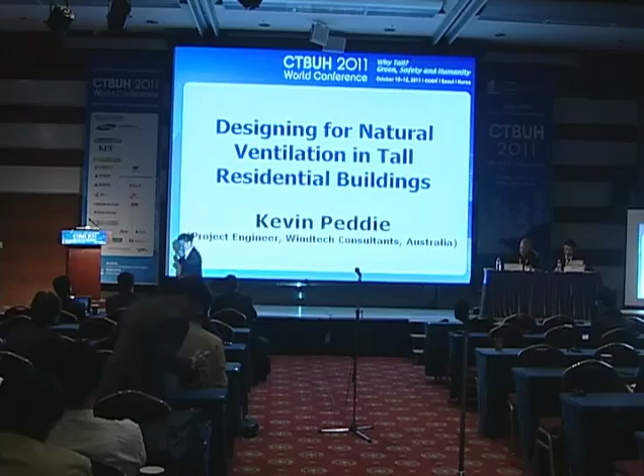Good afternoon, everyone. Today I'll be talking about natural ventilation for tall buildings. Natural ventilation design is something that is able to help the efficiency of the building after construction. A lot of these things aren't generally taken into account during the actual design process at an early stage. A lot of times we've been approached by architects or developers after the development's already been put in concrete. This does have a substantial effect on the design and the actual performance outcome.

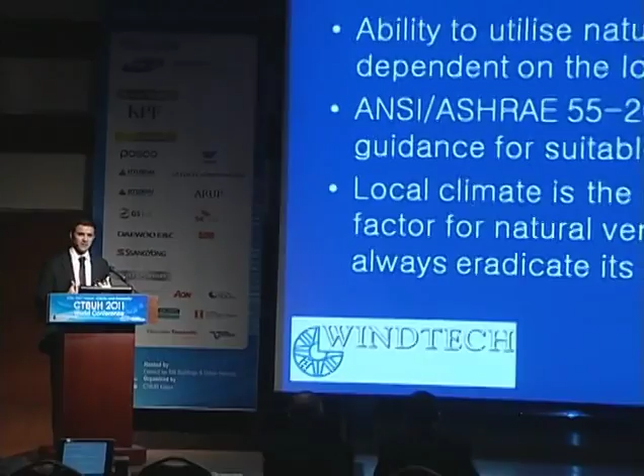Natural ventilation is something that's very much reliant on the location of the development. The building's location with its surrounding terrain, surrounding buildings, its local climate as well, is very dependent on what sort of output will be generated due to the flow through a residential apartment.

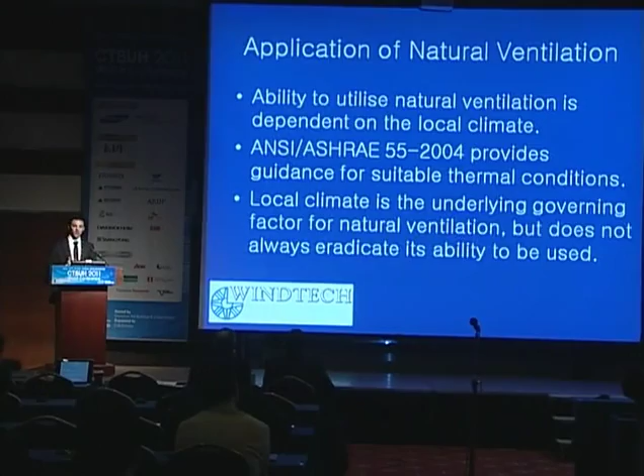ANSI and ASHRAE 55 provided guidance for what thermal conditions will be suitable, because there's two main key areas for natural ventilation: the air quality and also the thermal comfort of an occupant.

So when you think about it for yourself, you're in an apartment, either in a hotel room or so forth, the main thing you're looking at is: is the room too stuffy to breathe adequately, or is it too hot, too cold? Those are the two main areas of concern. This applies both in your own home, apartments, hotel rooms, and the like.

There's certain levels of allowances in these different temperatures or suitabilities that you'll be willing to handle depending on what control you have over the situation. If you're in an environment where you can't control the temperature, like this room at the moment, you'll feel slight changes in temperature. However, if you're at your own house and you feel slightly too hot, you're more welcome to get up, walk to the window, open the window. The temperature might not be that much different, but you feel in control of the situation, so you're willing to have slight variances in your body temperature.

The other thing to think about is whereabouts in the world it is. In Australia, there are certain temperature ranges occurring, not just times of the year but also times of the day. We have quite a mild climate in Australia whereby the temperature at night and during the day doesn't fluctuate substantially. But if you look at the Middle East, during the hot summertime, the day is extremely hot, whereas during the night, due to the clear air, the temperature dissipates quickly and you get quite cold nights.

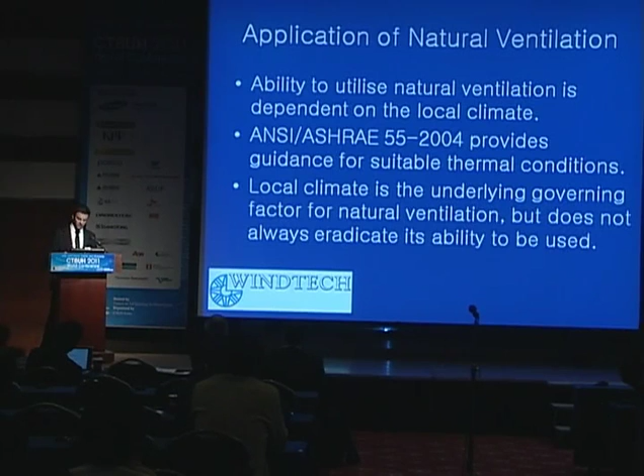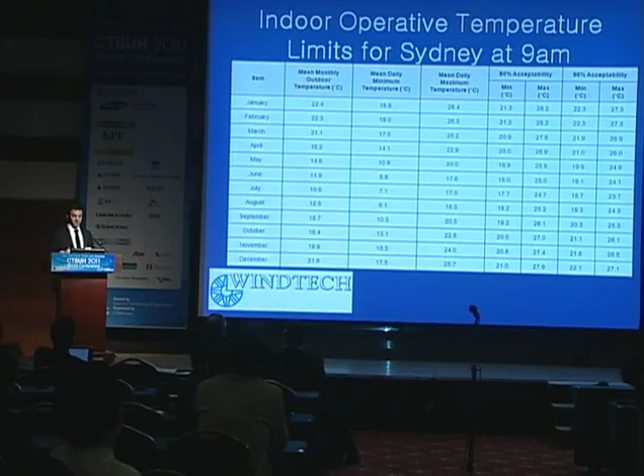I'll now show you an example - this is Sydney, in the morning, and then I'll show you an example in the afternoon. The way ANSI looks at it for temperature differences is it looks at the mean minimum temperature and the mean maximum temperature, and takes a look at a survey done to assess 80% acceptability by different occupants and also 90% acceptability.

So there's not really a strict guideline or criteria, it's more about getting the majority of people satisfied with the local conditions. You can see for Sydney, during the summer months, the mean daily temperature and the mean daily minimum temperature compared to the acceptability ranges can be satisfied. However, when you start looking at the winter months, which for Australia is June, July, we now start to fall outside of these ranges, so people start to find it actually becomes too cool for their liking.

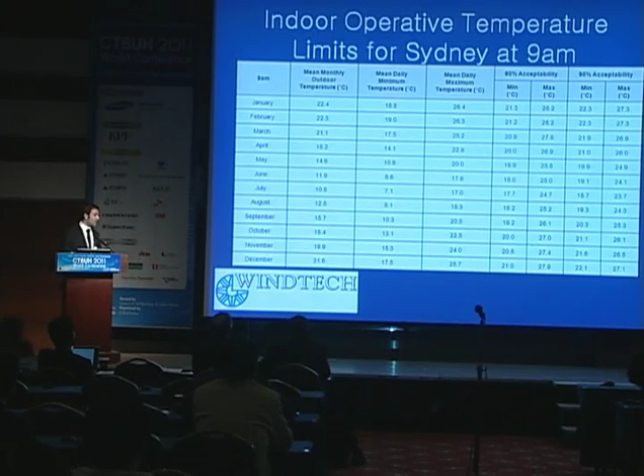I'll show you an example of this in the morning, and an example in the afternoon. You can see here it now extends a little further, not just for June but also July and August, where you have this issue.

I actually had a personal experience of this, buying a new house at the start of the year—well, not new, a house technically termed as having potential. The previous occupants had a total of 14 vents located on different aspects. This was beautiful during February when I bought the place. The house was nicely aerated during the day when I was out, and I came home at night feeling fine.

However, coming into June and July, I started to notice airflow was not really what I wanted during these times of the year, so that was quickly fixed with a bit of gyprock to hide those holes. The aspect I had to take was that I found it too cool, so I had to close this system down. However, the benefits I was finding at different times far outweighed these other circumstances. This could be controlled a lot simpler than closing off a fixed vent—it can be used through an operable window.

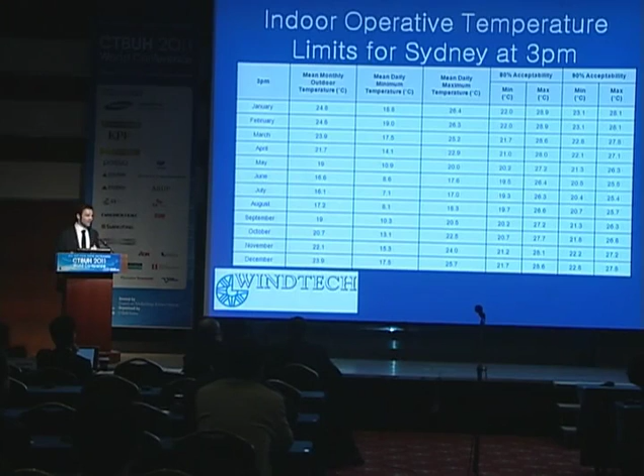Other benefits of natural ventilation are not only for the occupants themselves, but also running costs. One study looked at the effects of taking a new development and designing it to be naturally ventilated as opposed to a retrofitted development. For a new development to account for all the procedures, a cost per occupant is about $1,000 per person for changes like additional window openings. However, to retrofit an existing development, you're looking at about $3,500 to $4,000 per occupant.

However, when we look at the benefits, the study found the benefit for health showed about $60 per occupant—not much to say. For energy, it's about $110 per occupant per year, so it's still not weighing up too well. However, a further study found that productivity, not just for residential but also office-based setups, showed a benefit of about $3,900 per person per year.

This is measured by looking at a couple of factors. One is actual absenteeism from work—I found that a building designed for natural ventilation has 70% fewer absentees. This is due to better air quality. With a mechanically designed room, air changes through the space have to be in the range of about 5 air changes per hour, because the quality of air being pumped in isn't as high as nature, whereas a naturally ventilated space gets fresh outdoor air coming in and exiting another avenue.

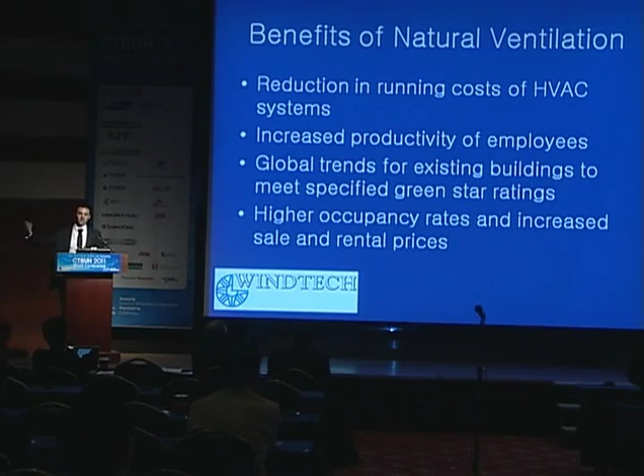You think, gee, that's relatively high considering this is where our parliament is, so it's heavily dominated by government employees. However, when he actually looked into that 11% further, there's a 2% component for buildings designed for high energy efficiency, while the remaining percentage is pre-existing older buildings that haven't been retrofitted. So you start to see, just by designing more energy efficient buildings, owners are getting a much greater return, not just through higher occupancy, but higher rental returns as well.

Now, natural ventilation criteria really depends on what the building is and what the intended use of a space is. It could depend on the size, so the requirements for this room here, which is to be utilised by a larger number of people, as opposed to say a bedroom or a study, is obviously going to be different. There's also the intended number of occupants, and the materials used within that room, because materials themselves give off an odour that needs to be transported outside, otherwise it creates stuffy smells inside.

Now, this generally equates to about 1 to 2 air changes per hour for air quality, based both on the ASHRAE standard and the Australian standard. There's a separate criteria for thermal comfort, which I mentioned previously, which is ASHRAE 55. Further to these criteria, there are also sometimes local planning requirements for some areas.

Some of these might require up to 70% of units satisfying naturally ventilated needs for a development to be considered naturally ventilated. However, a lot of the time, the actual planning requirements don't know the nitty-gritty of how efficient a building should be. For instance, local planning in Sydney itself, which I'll show some case studies for coming up, says for a building to be naturally ventilated, you need to achieve 60% of apartments considered naturally ventilated.

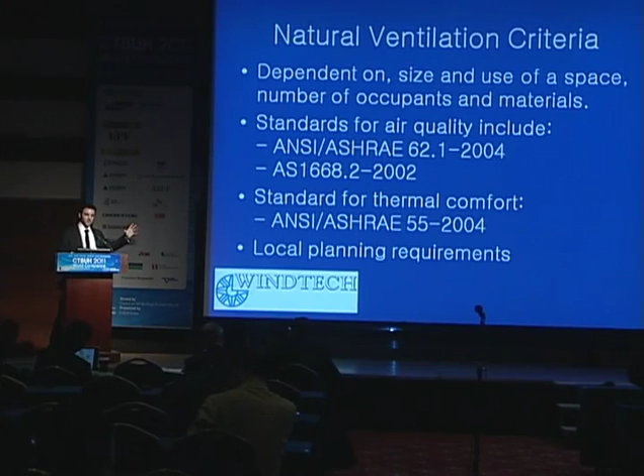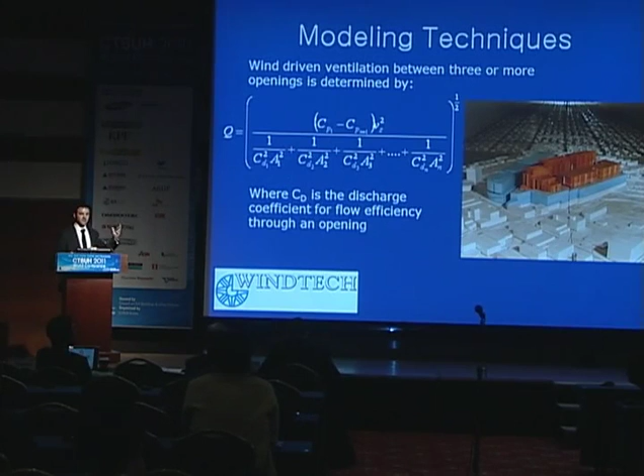Now, I'll go through a couple of different case studies whereby natural ventilation is being considered at different aspects of the design. This first development is only relatively small in the grand scheme of things, at 25 stories in height. It's located in Parramatta, which is essentially the second commercial hub of Sydney. It has numerous single aspect units on the eastern and western aspect.

Now, to get an idea of the driving factors for Sydney, during the warmer months of the year, as I was showing previously, where you'd want to use natural ventilation, the main winds come from the northeast and southerly directions, with the westerly winds becoming more prominent during the winter months.

Now, for testing of this development, prior to doing testing, we actually met with the clients very early on. There was an initial design scheme done for this development, and then new architects came on board and said, right, this is what we want to achieve, this is what the client wants in the end. What do we need to do to achieve these aspects?

So the first thing we looked at was these areas that have large setbacks in sections. We looked at using that to be able to generate pressure differentials. We recommended having large stepped facades to make use of the northeasterly winds, generating pressure differential between openings. This has been done on numerous occasions.

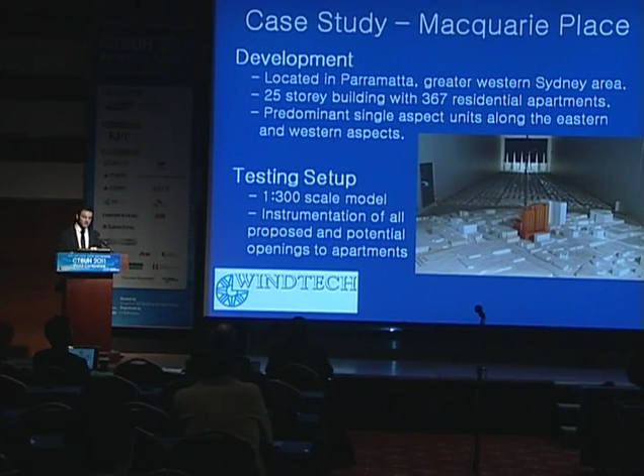The requirements for this area, being located in Sydney, based on thermal comfort, change in temperature about 2 degrees, equates to about a 0.4 metre per second flow through an apartment, and also 2 air changes per hour. We provided initial design recommendations, however this was altered due to the internal layout of the building needing to be changed, so it ended up only being 2 of these setback sections were able to be used, meaning only 52% of the apartments were able to achieve natural ventilation. Whereas previously we also tested the original design and they were able to achieve up to about 80%. So you can see facade changes alone can have severe effects on these outcomes.

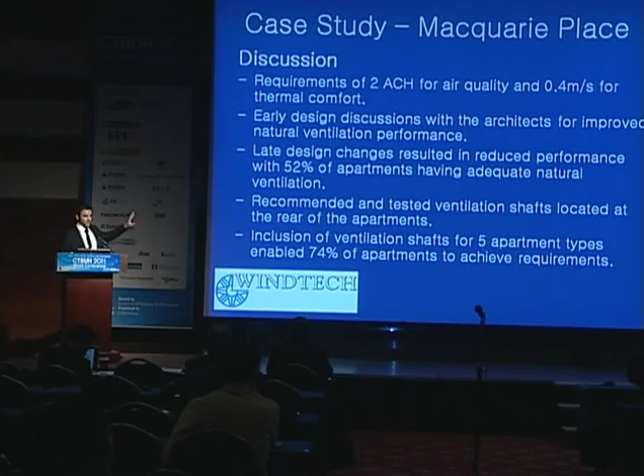However, additional recommendations were done and tested whereby we look at a ventilation shaft, essentially located at the rear of the apartment, and it works off pressure differential between the facade of the building and also a negative pressure region at the roof of the tower. I'll go through this in a bit more detail in my third case study as to how this works and the studies we did.

This essentially is just a diagram showing how the flow path ended up working. So you have a high pressure region at the main aspect of the tower, in through the window areas and out up through the back, so you get flow through the whole apartment. These ventilation shafts are broken up into 3 levels, essentially because as you go up the building you get different pressure regions. If you just use one single shaft, you can have essentially a short circuit at the top of the tower.

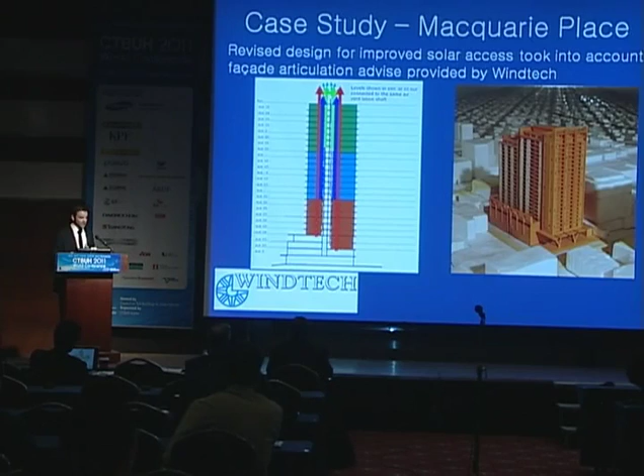This is another development. It's a 42-storey building located in Chatswood. A couple of interesting requirements for this job: it's located hard up against a railway line, so they had strict requirements as to window opening sizes that face that, due to the rail authorities' safety concerns of people actually jumping onto the railway tracks or throwing things onto the tracks.

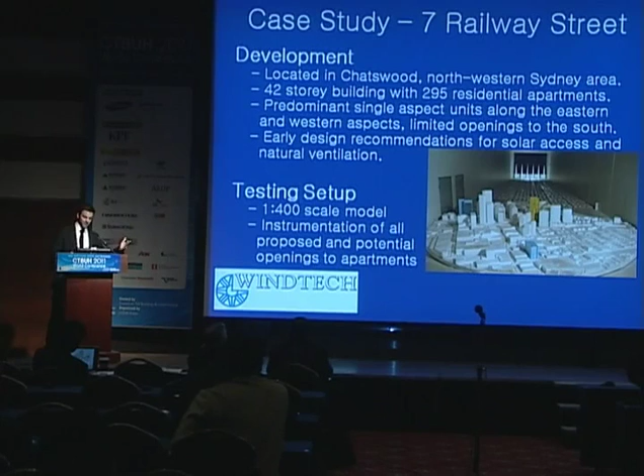We've actually provided initial input into this, as to provide solar access requirements for the apartments as well, which provided some slight facade articulations.

So we ended up providing recommendations as to window opening locations. Some of the window opening locations end up putting windows for the same apartment in the same pressure region, so just by simply changing where openings are located can help provide a pressure differential between those apartments, even for single aspect apartments. Also pushing facade lines out to the very edge of the glass of the building profile and having a second, virtually a setback balcony area to generate your own pressure differential.

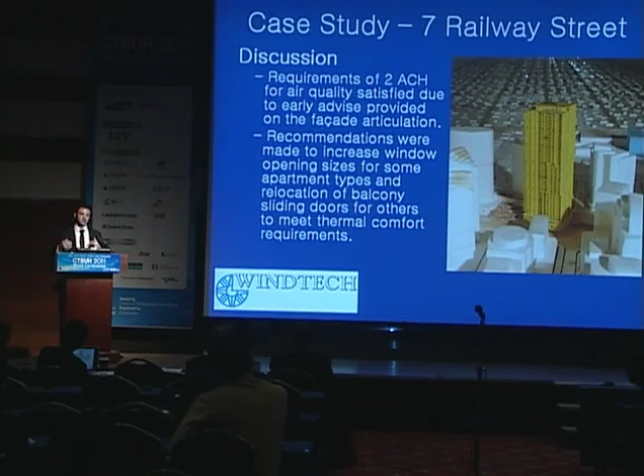This last case study I'll go through is actually quite a shorter building. The other two are still currently going through construction. This last one is only 17 stories in height, essentially 2 buildings connected by a central link bridge. Now, I'll be talking through a case study for a unit apartment located just here.

Now, the unit itself has numerous windows for the individual units, however they all face the recessed balcony area. The external balcony has a top-hung window, so very inefficient for airflow to go through, whereas the other areas had large sliding doors, so very free flow. However, the apartments weren't satisfying the requirements.

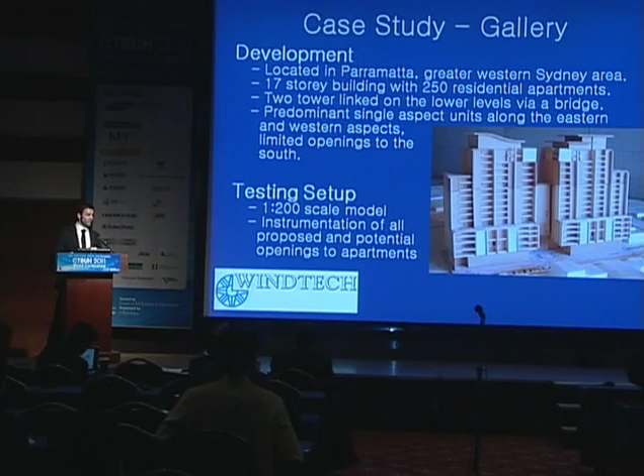For this development, we recommended that we look at either putting a rear-mounted ventilation shaft or changing window configurations. The client themselves ended up going with the ventilation shaft. They were themselves a bit sceptical about it, but we proved through wind tunnel testing that it can work.

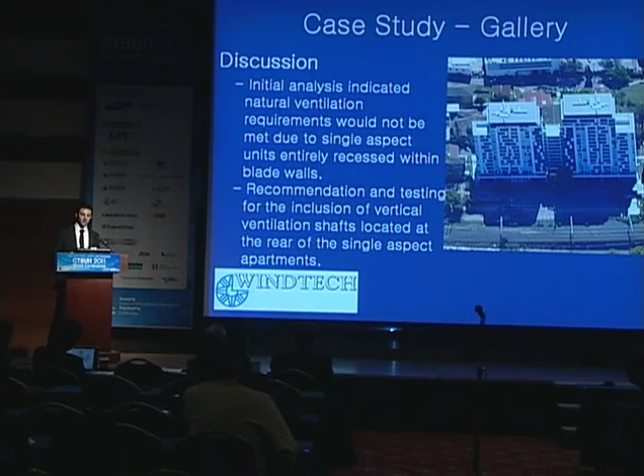One of the other concerns was they came at a later stage and put sunshade features on the balconies, which can be operated by the occupants. When we did the testing, we were able to prove that it was able to satisfy ventilation for these occupants, and they were able to control it.

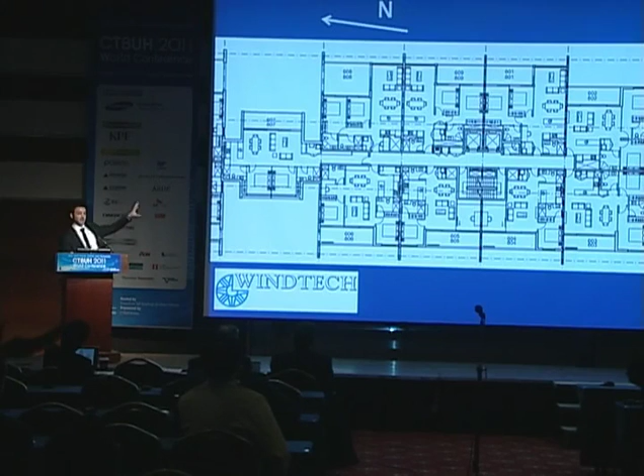However, it always comes down to, does it actually work? So, as I mentioned before, the apartment I'll be talking about is 601, located just here. It's a 2-bedroom apartment. This is just the southern aspect of the tower, with the other tower located towards my end. This is a closer view of the tower.

There were sliding doors located for the 3 aspects - main bedroom, second bedroom, and the living space - all linked to a recessed balcony area, while there was a top-hung window located further out. We had recommended a rear-located ventilation shaft, which they were able to install at the back area in the master bedroom. This is able to be put in the master bedroom purely because it's a single unit. Obviously, if this had multiple people living in these areas, you might have to look at a different location.

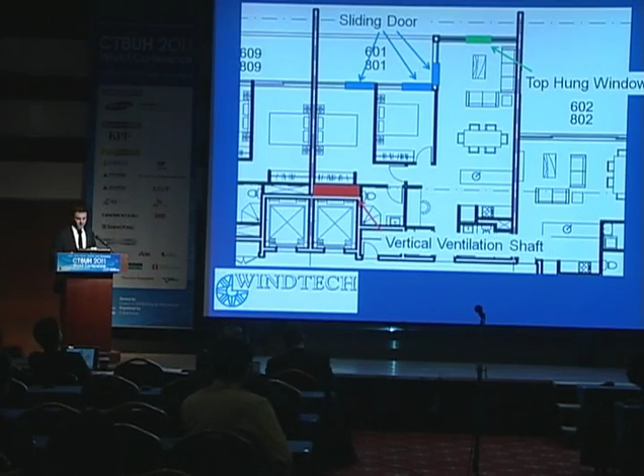We did full-scale testing for this development after it was completed, to measure the actual flow from the window opening through to the ventilation shaft, to make sure the flow is working properly. Because concerns with the rear-mounted ventilation shaft, which is shared with other levels, is there'll be smell issues, fire issues, and noise issues.

However, we went through this with acoustic engineers to be able to line the actual ventilation shaft to minimise noise issues. Special one-way, single-way louvers were designed so the flow just goes from the apartment to the ventilation shaft. We have to make sure the flow itself is actually working that way, otherwise there'll be no flow.